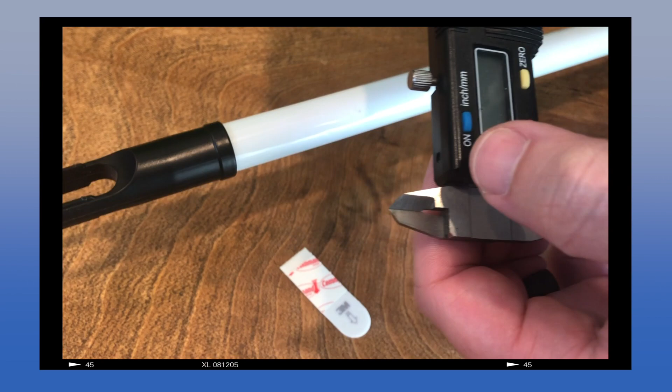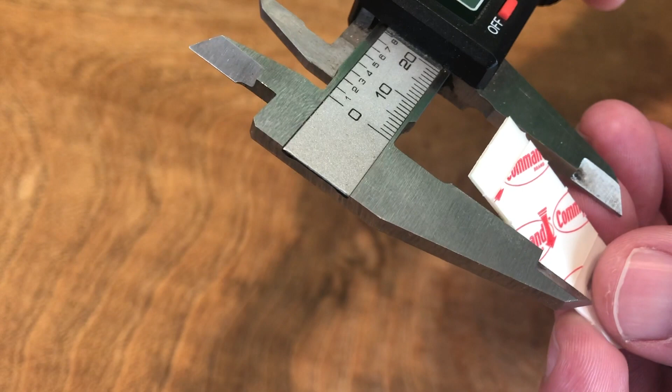So we'll do 19.3 millimeters in diameter, and I believe that's 3/4 of an inch. Yeah, just about 3/4 of an inch, a little bit bigger than that. And our command strips are going to be 15.65 and 34. Okay, so we'll design around that.

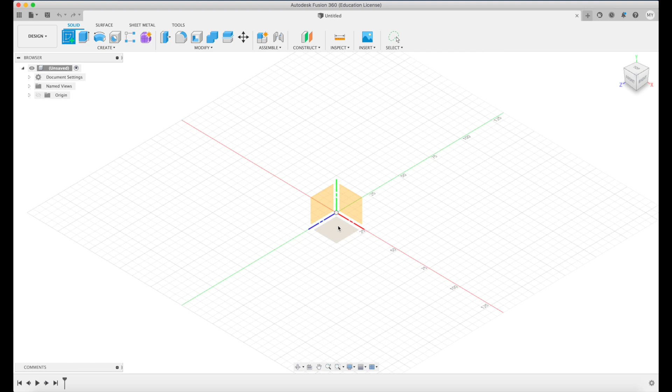We opened up Fusion 360, pressed the sketch button, create, and made a circle. This is the diameter of our broom handle, and now we're building out that diameter for the hook.

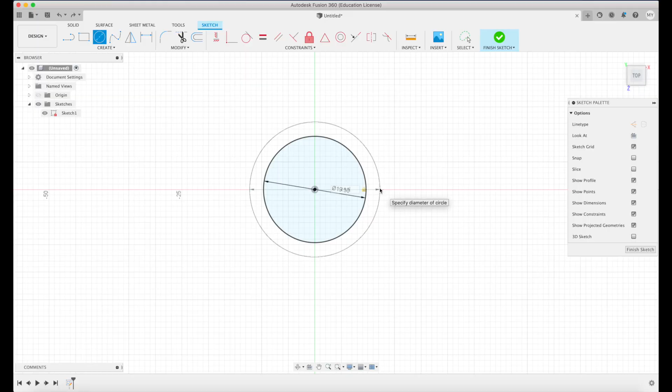Now we're making the base of the broom handle. That will end up having the command strip connected to it, and we're just going to use a tangent command to connect the two pieces. And then we're going to center it.

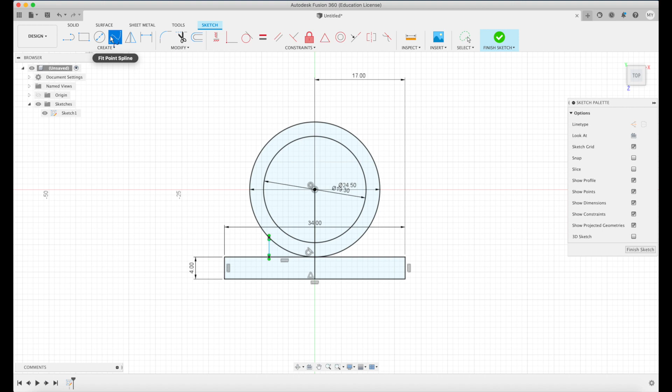Now we're drawing a dividing line because we're only going to sketch out half of this broom handle hook, because we're going to take advantage of the mirror function. This saves us a lot of time in designing both ends. Yeah, and they'll be perfectly equal. Exactly.

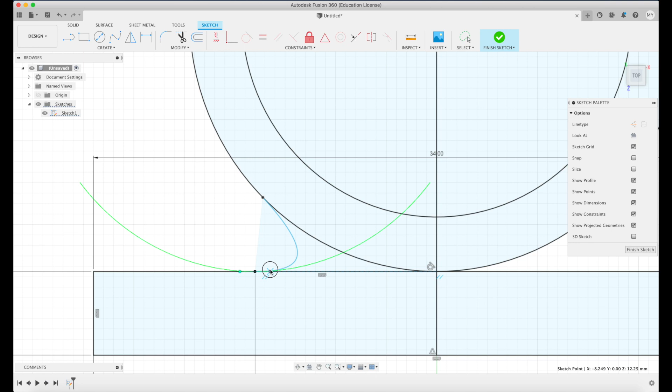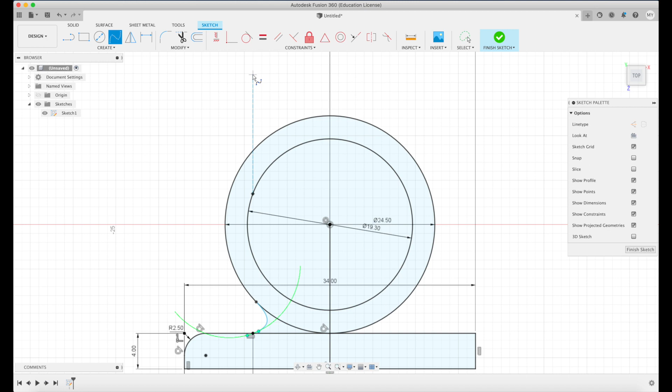We're adding fillets. Now we need to make a way for this broom handle hook to open and kind of flare out. So we're going to use a spline and curve the line so that it's enough to catch the broom handle while it's in there, but open enough to where we can get it out.

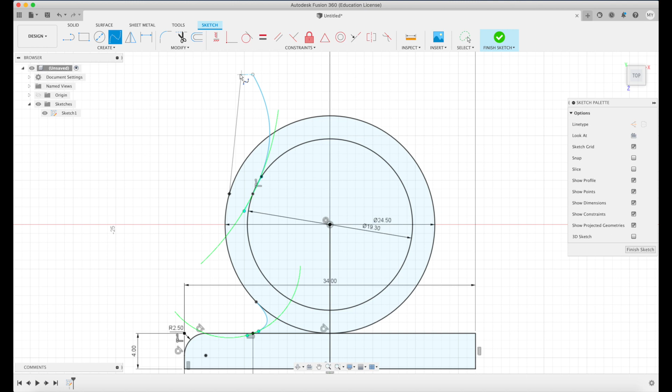And we're just guessing at this point. That was pretty good right there. We'll make another one, and curve it.

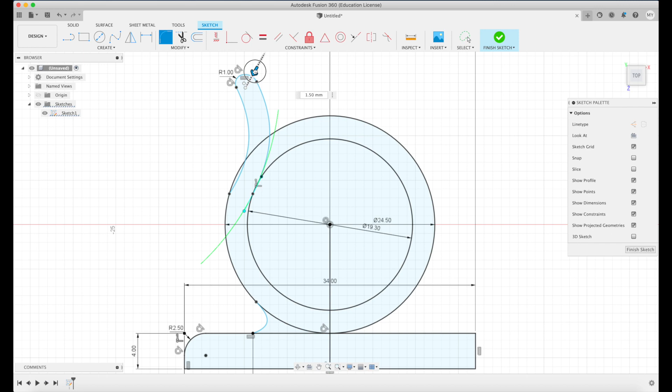Now I'm using the trim command to delete the pieces of our sketch that we don't need anymore.

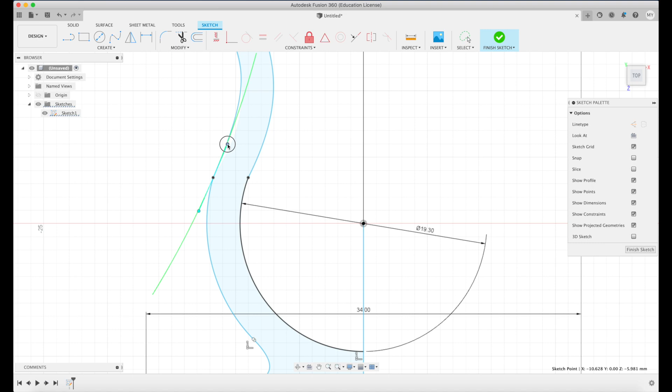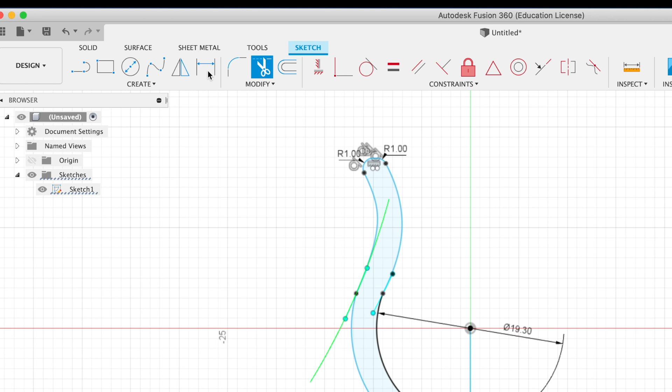Now we have our basic design of half of it, and we're going to use the mirror command to mirror the other side.

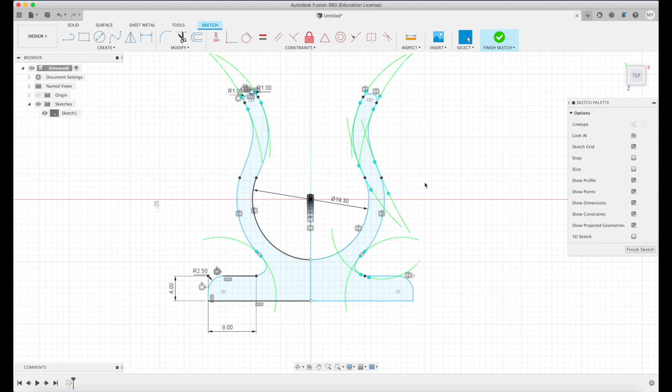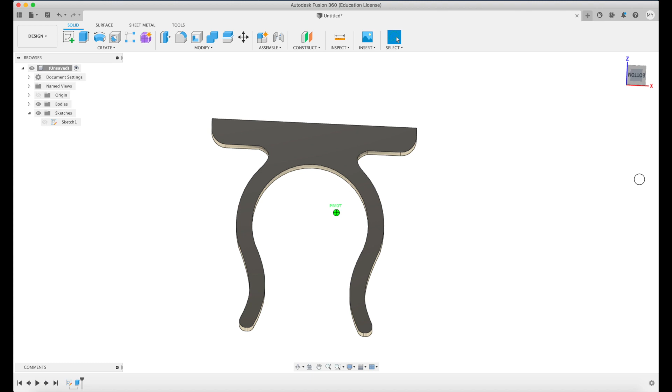And finally, we can extrude it out, so it's not flat. There it is, looks very nice. We'll just add some fillets on the top and bottom so it's a little bit nicer, not super sharp. Now it looks perfect.

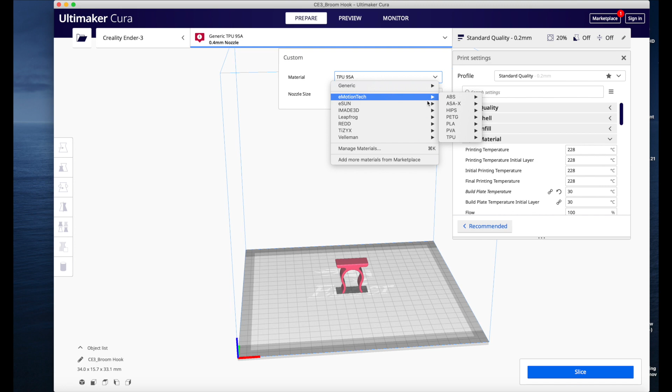So we opened up our slicer, Ultimaker Cura, and you see how it's up on little tips. We're gonna make sure we move it to a different direction so it'll print nicer, because it's not going to print really well standing up on its two little legs like that. So we're going to flip it around.

But first we're picking the material so the heat settings will be right for our application. We're going to use a TPU. Now we're going to flip it.

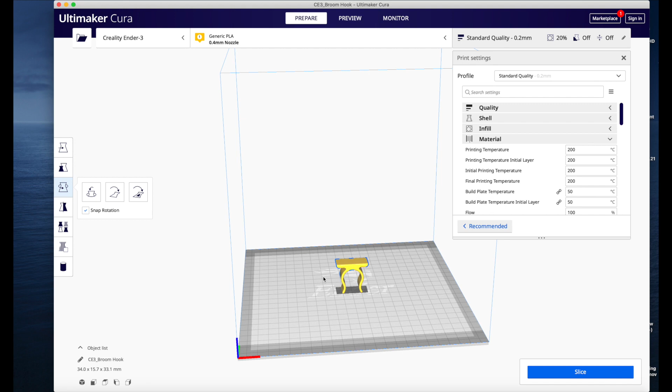This is probably the best way to print it, flipped like that, but it'll actually be stronger in this orientation. So we decided to flip it on its side instead of on its back.

Preview it, just make sure we won't run into any issues.

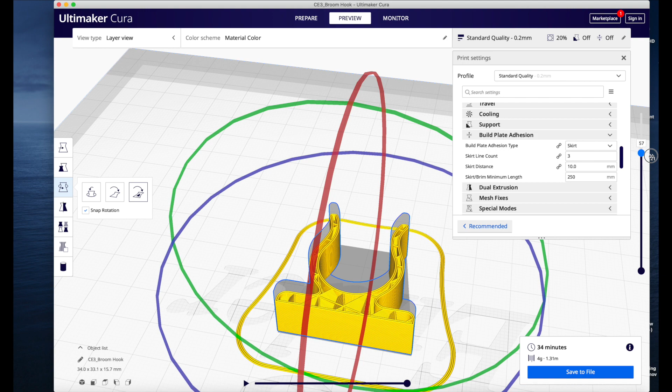Yep, that's that. So we just finished our design, so what filament are we going to use? We're going to use a TPU filament because it's not going to be exposed to UV light. It's going to be kind of in a dark corner of the RV, so we're not concerned over it being degraded under UV light, and it's not going to be under constant tension because we designed it around the broom handle, so it should be fine using just PLA, but we need to swap the filament in the 3D printer. So let's do that.

All right, so we're going to use our PLA, but first we need to take out our TPU material that we used on our keychain. We already have it preheated to 200 degrees, so we'll be able to pull out this filament.

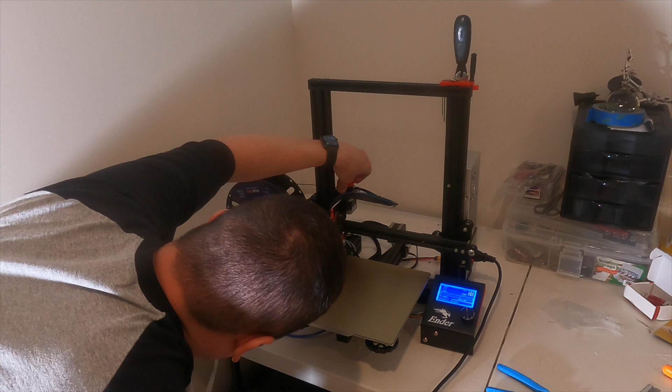Use our app to start the print.

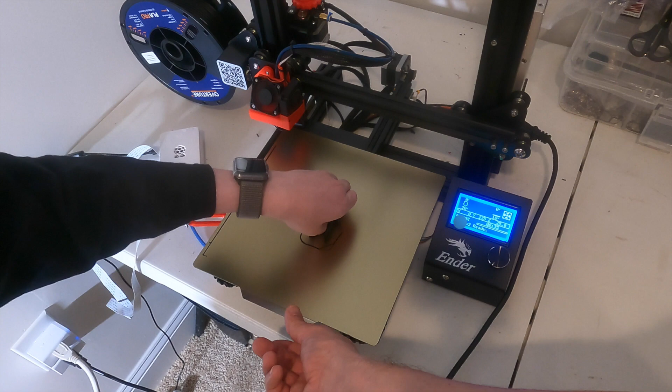Right, pull it off. Yeah, it's finally done. Oh yeah, remember? We bend it, and then pop it off. Nice.

Looks like we'll be able to snap in. We'll have to try it. Let's go.

So now let's hang up our broom hook. Wow, it's like that back was custom designed for that command strip.

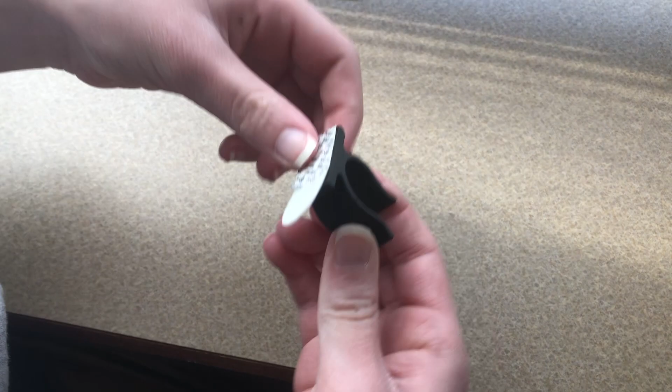It was. Oops, I put it on uneven. Oh well. Right here? A little lower. Lower. Lower. Right there.

Was this to pull it up in case we want to get rid of it? Yep. So now we can cleanly remove it if we want to by pulling that tab.

So put that broom in there. Nice. Now pull it out. Nice, that works perfectly. What do you think?

It's good. Now we have to put it like everywhere, even in our house. It's nice, so instead of it falling around, I have a broom hook.

Why do we make a broom hook even though we could have just went to Walmart and got a $1 broom hook? Well, it's about making stuff, and that's kind of the cool thing about 3D printing and designing is you can make it custom to your needs, and you could pretty much make anything.

Get it at home and not have to leave the house and make anything you need. So we value the experience of just designing our own and printing it out, even though we could just get one for $1.